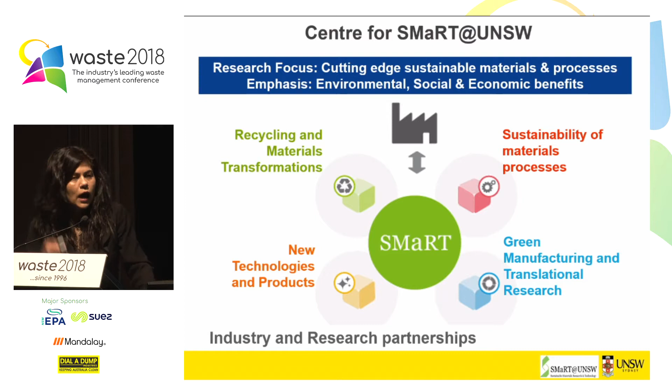Remember, in these niche materials, it's not about mass production, it's about niche, high-quality materials, and we've got the smarts to actually do it. So innovation is really very much, for me, about doing things a lot better.

So ultimately, at the end of the day, we can deliver solutions that make lives better for people. Everything that Gail referred to earlier about creating jobs, it's about delivering value-added solutions so that we can have advanced technologies and the all-important competitive advantage for businesses.

That is important. How are you going to compete in a global marketplace if you're just basically pushing out low-value materials? So you need to be able to push out high-value products that the world actually needs.

This is why when we talk about battery storage devices, energy storage devices like batteries and so on, the journey of innovation for us at UNSW has been very much about understanding the big picture, all the things that I've told you so far, about understanding what the future challenges are going to be.

If we are going to make energy storage more and more affordable, it's like photovoltaics, like solar cells. How do you actually make it more affordable? It's about understanding the materials and the technology that goes into making PV cells. In the same way, energy storage is going to become more and more affordable if you can understand what materials the manufacturer needs. And if we can be part of that supply chain, that's fantastic. So it's about delivering economic benefits and value to businesses.

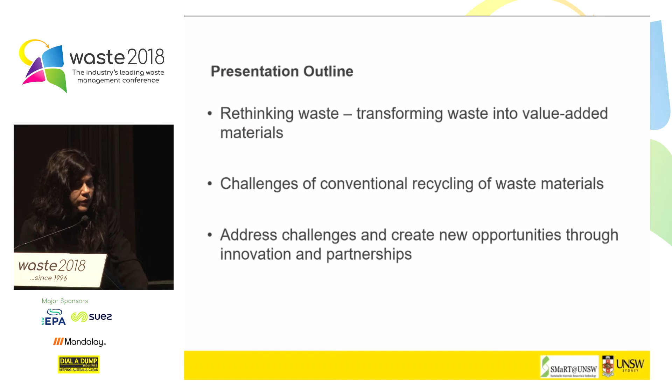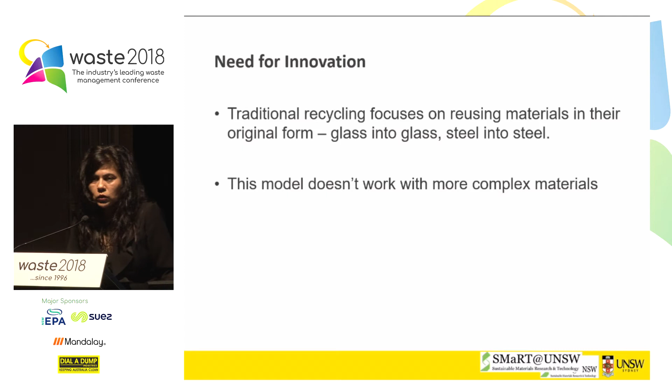So really it's about creating new opportunities, and I'll take you through a little bit of highlights as to what these new opportunities are. We've shown some of them are possible. And why are we doing it? Quite simply, traditional recycling of always converting waste plastics to plastics doesn't necessarily work all the time. That's why we need to tap into where the money is.

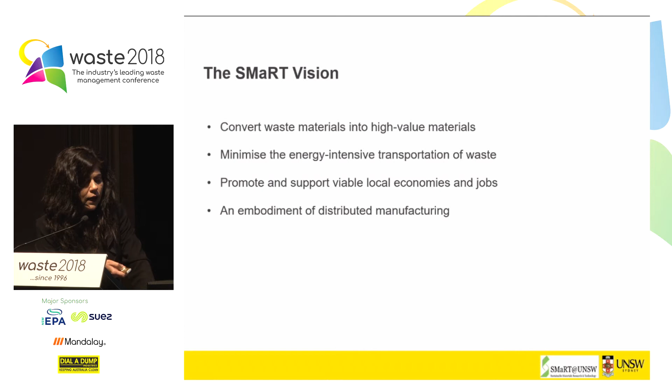I'm going to skip through some of these slides. A lot of our work, proven now through our own microfactories, has shown that you can achieve a lot of these outputs. Remember, these are niche, high-value alloys. You don't need large, mass-scale production. What you need is the ability to show that it can be done on a micro scale where you can have distributed manufacturing, so you can carry out that transformation wherever waste is being stockpiled. Those are parts of what we're trying to do as part of the vision in the Smart Center.

I'll skip through in the interest of time, but you all know what kind of e-waste plastics I'm talking about, whether they come from printer bodies and other hardware. The Smart Center's goal is very much about creating value-added products.

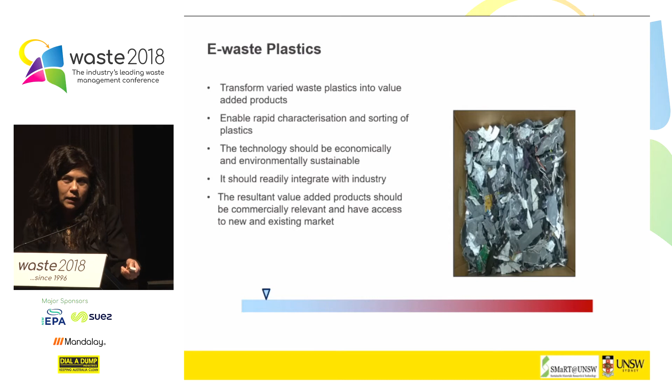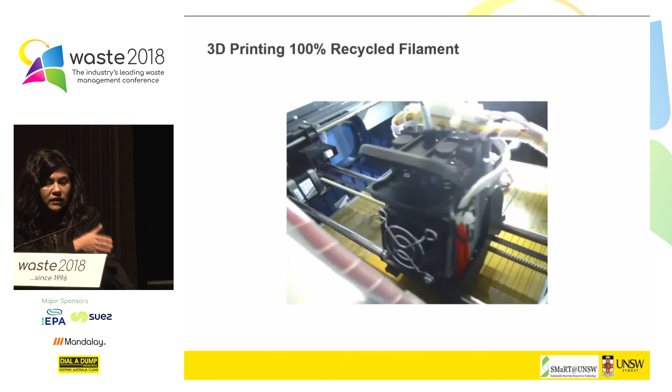I'm going to show you one video if it plays. This is what the 3D printer is doing—it's actually printing out products from e-waste plastics. Remember what we've done here: we've created filaments, produced out of e-waste plastics. We've then converted those filaments using 3D printing into finished products. That's really what we're trying to do as an example.

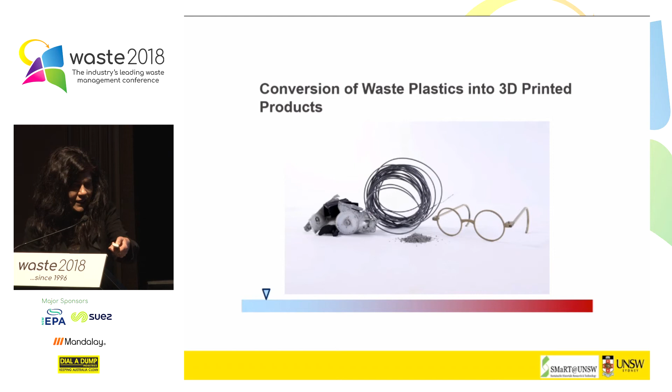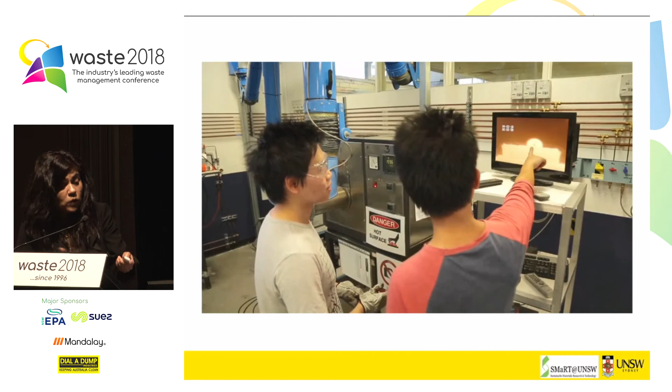I'll just skip through some of these since we're running out of time. A lot of the work we're doing also has implications for producing oxides, rare earths, metallics. All these videos show transformation at high temperatures, meaning manufacturers can create a lot of these types of solutions without necessarily depending on smelters that operate at high temperatures.

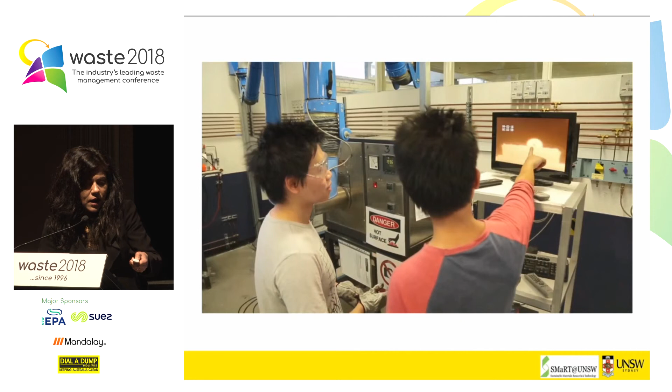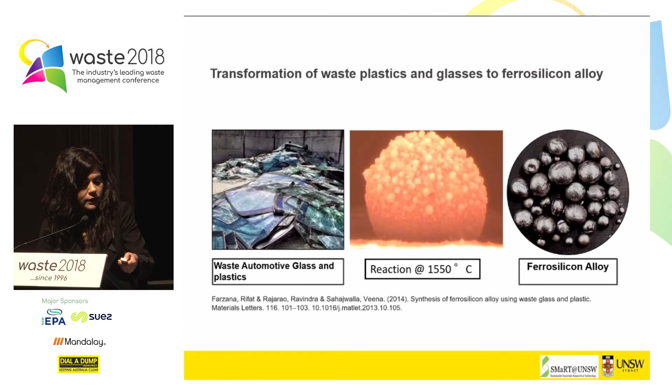I'll mention very quickly the point about going through this journey of reduce, reuse, recycle—to leave you with a fourth R, around reform. How do you actually reform these materials? This science is all about enabling that reform to take place so that you can create high-value materials.

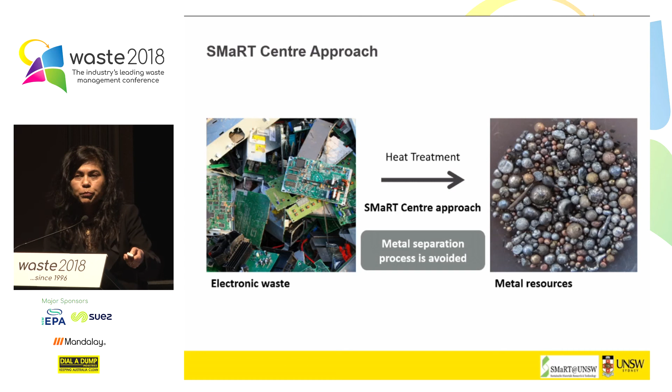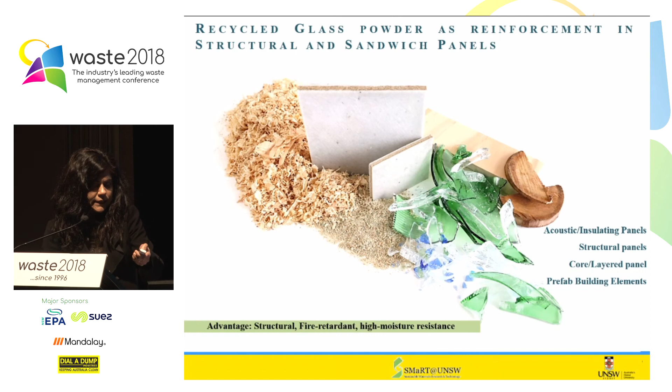Some other examples for building applications: panels made out of wood, glass, textiles. I'll skip through quickly to show you a few pictures, whether they're acoustic panels or thermal insulation panels. Many of these are made by blending different types of waste resources—textiles, wood, and glass. It comes down to what kind of application you want, whether for acoustics or structural panels for flooring and walling.

The engineering of all of this comes down to how these materials bond together at the molecular level. It's not just about gluing it together, but about creating bonding at the molecular level to allow some of these smart products to be manufactured.

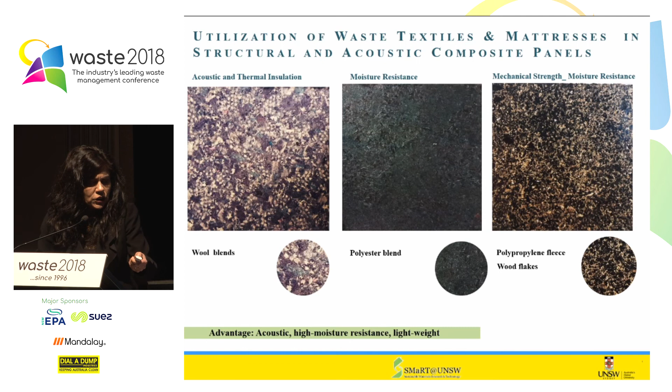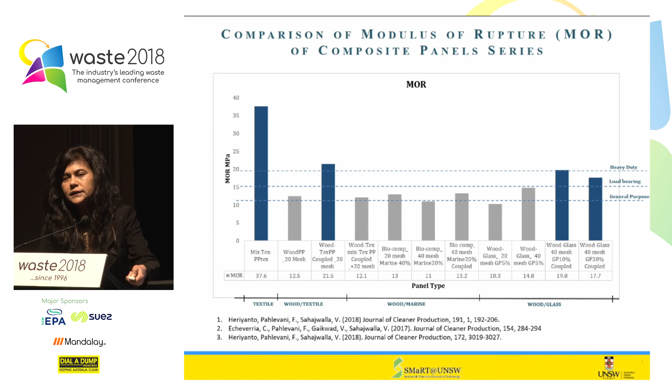Just to finish off, and I'll try to get to the final slide—some of these properties, like modulus of rupture, I won't get into the details. The scientific papers explain this for anyone interested, whether it's for general purpose applications, load bearing, or heavy duty applications. A lot of those publications are available in the public domain.

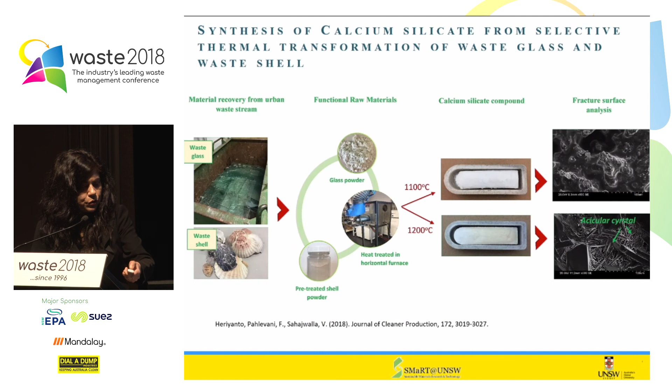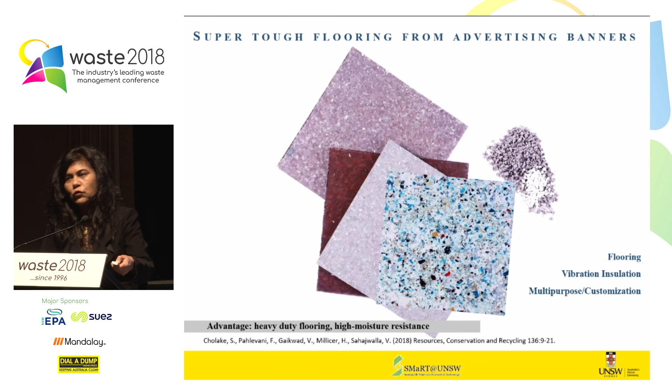I'm going to quickly get to some of the other very interesting looking products. All of these are just to show that waste resources can actually be transformed and reformed into valuable materials. I'll probably stop there because I'm sure Gail wants me to finish up.